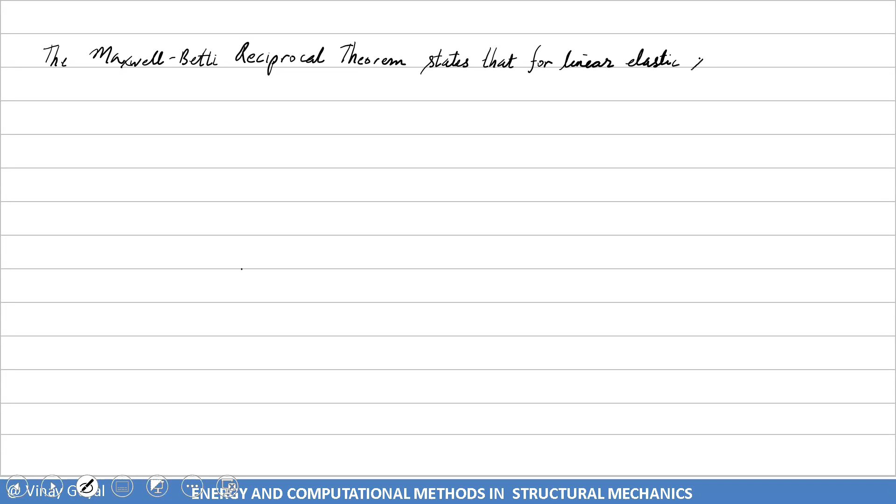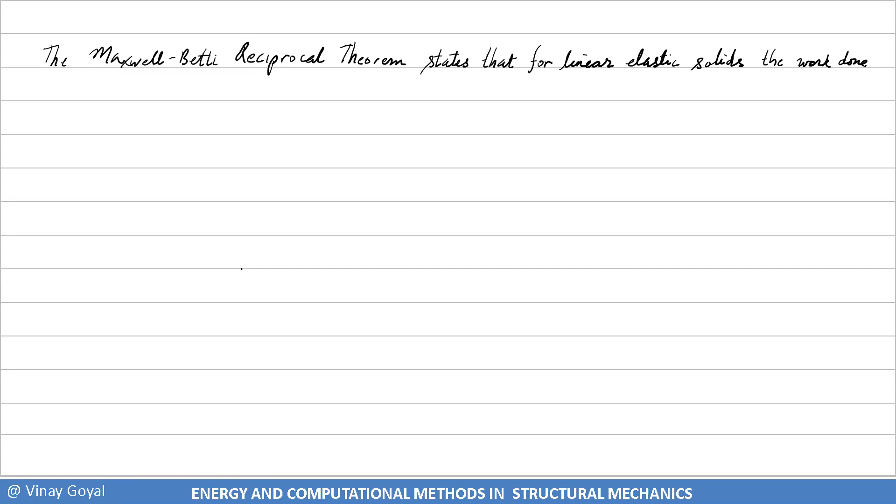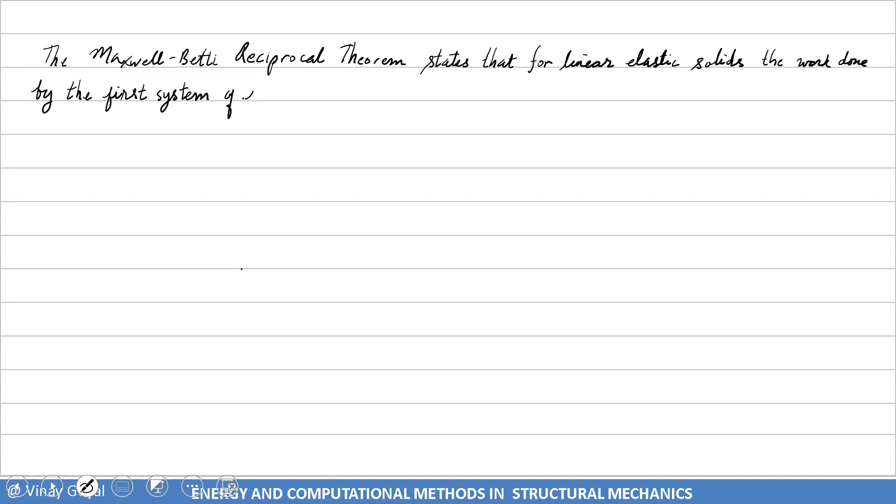The Maxwell Betti reciprocal theorem states that for linear elastic solids, the work done by the first system of forces 1 through the displacements caused by the second system of forces 2 equals the work done by the second system of forces 2 through the displacements caused by the first system of forces.

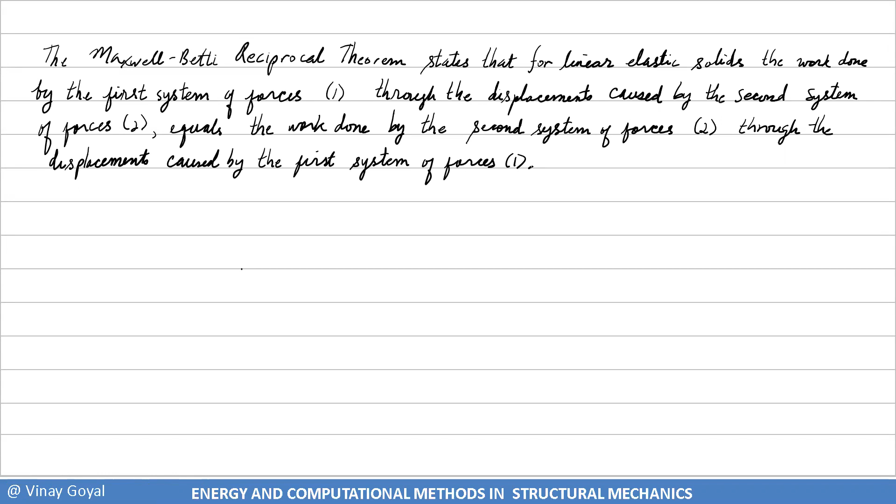And for this theorem to hold, it is necessary that we have a conservative deformation process.

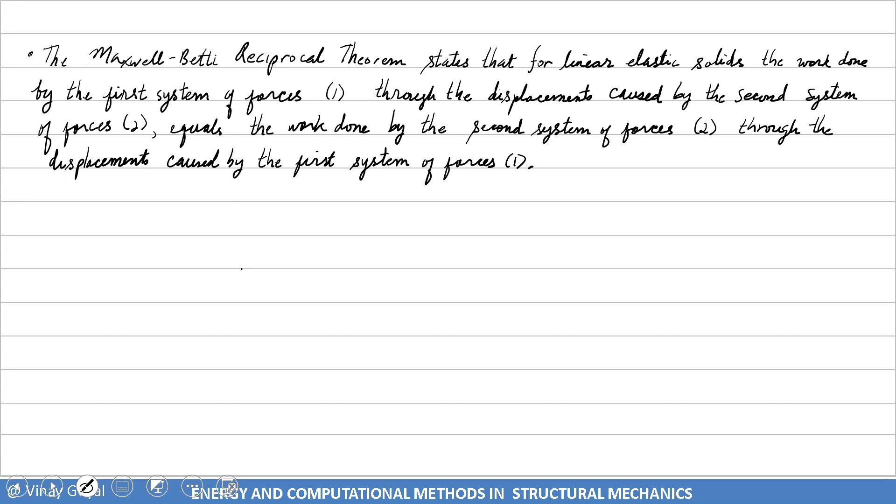This theorem is important because it explains why the stiffness matrix in 3D FEM finite elements is symmetric when we have a conservative deformation process and conservative loads. So anytime you have a conservative deformation process and conservative loads, you will expect a stiffness matrix in 3D finite elements that will be symmetric. The Maxwell Betti reciprocal theorem is basically the reasoning behind that.

So what is Maxwell Betti's reciprocal theorem? It states that for linear elastic solids, the work done by the first system of forces 1 through the displacements caused by the second system of forces 2 equals the work done by the second system of forces 2 through the displacements caused by the first system of forces 1. I want to walk you through what this is through an example.

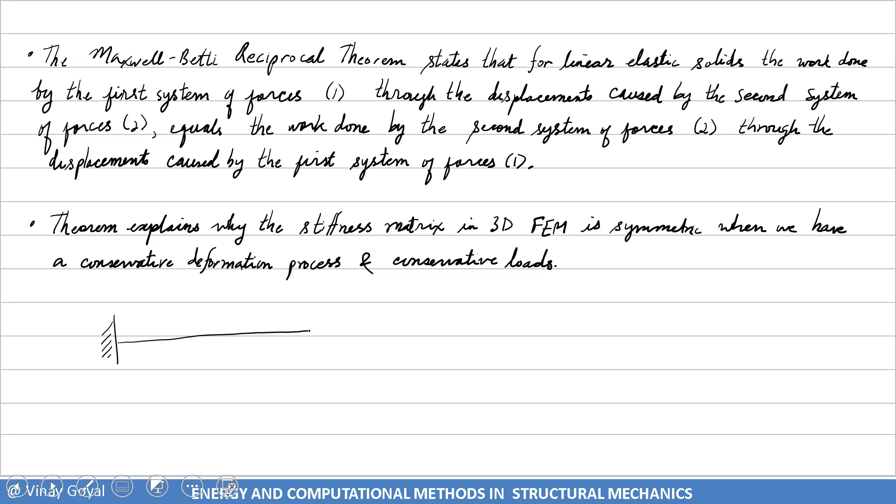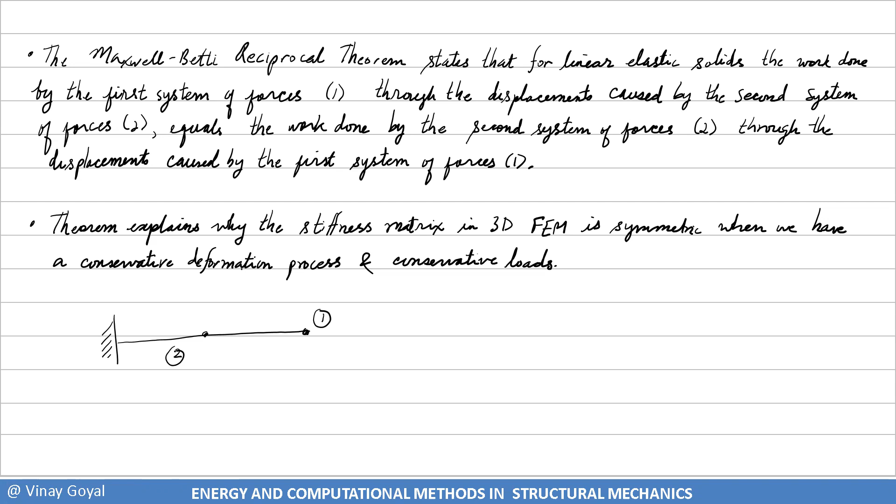Let me try to explain what this theorem is really saying. I'll consider first a clamped beam, and this is my first system. In this first system, I'll define points 1 and 2, and I'll apply a load P here. This load P is going to cause a deflection of that beam, and I'm going to call this deflection delta. That deflection was caused by load P, so I'll put delta sub P at point 2, so it's clear what's going on.

Then I'll consider another system, but this time I'm going to mark the same points, 1 and 2, and apply a load Q here at the same location where point 2 was. So these beams are the same, and now this beam is going to deflect like that. I'm going to call this deflection delta Q1. What the Maxwell Betti Reciprocal Theorem is really stating is that if this is a linear elastic solid...

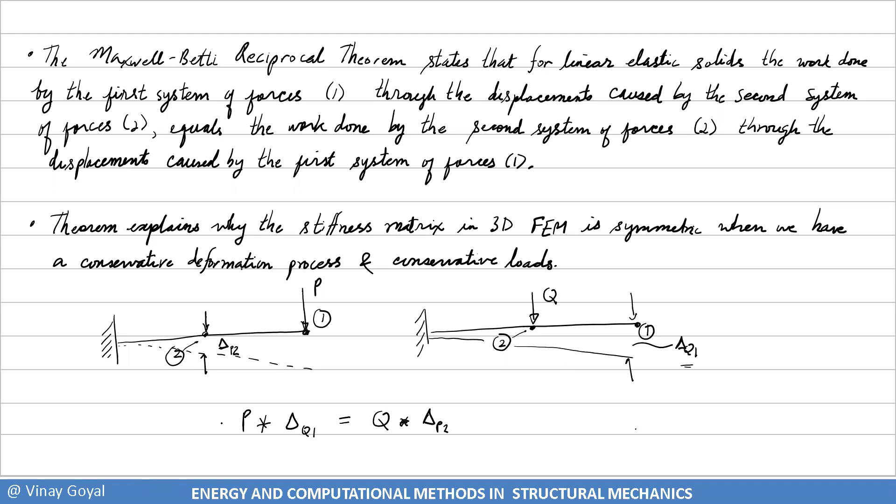...the work done by the first system of forces, 1, through the deflections caused by the second system of forces, 2, equals the work done by the second system of forces through the deflections caused by the first system of forces, 1. In other words, if I multiply P times this deflection here, that's going to be equal to the force Q times the deflection at this point 2. That's it, that's what it's saying.

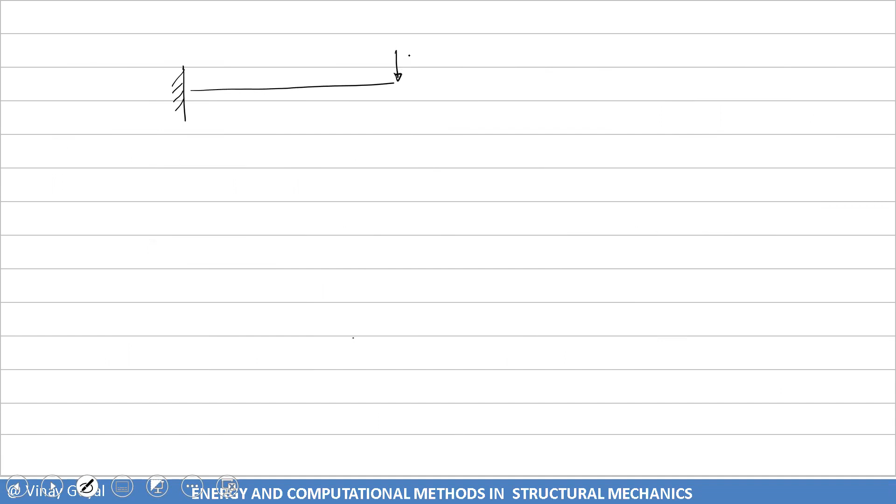So let's consider the following example. I have a load P equal 4 pounds, and the deflection at this point, at a particular point, is measured to be 0.01 inches. Then I have another system, and in this system I apply a load of 10 pounds. I want to know how much this deflects, and I'll call this X, that deflection.

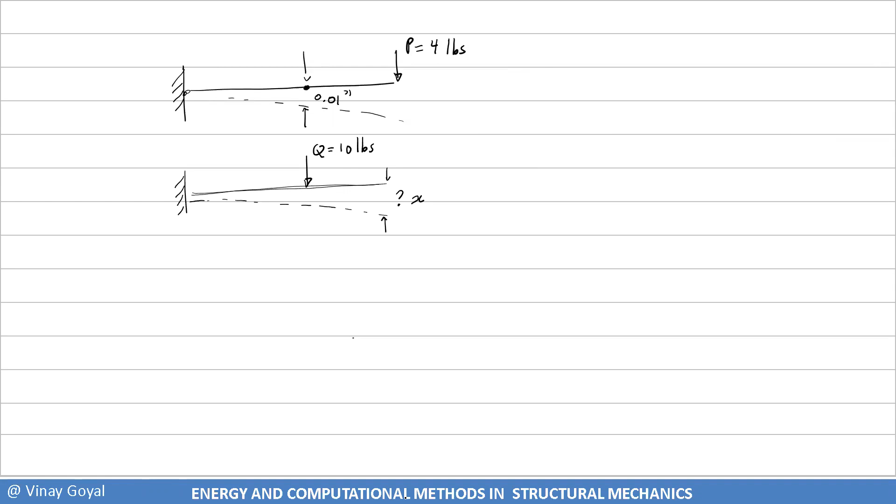So the answer is very simple. What Betti's reciprocal theorem is telling us is if the material is elastic and I have a conservative deformation process, I must have this situation: 4 times X equals 0.01 times 10. So 4X equals 0.1, and X equals 0.1 divided by 4. Very simple, and now I have found the deflection of that beam given this information. So that's what Betti's reciprocal theorem is telling us.

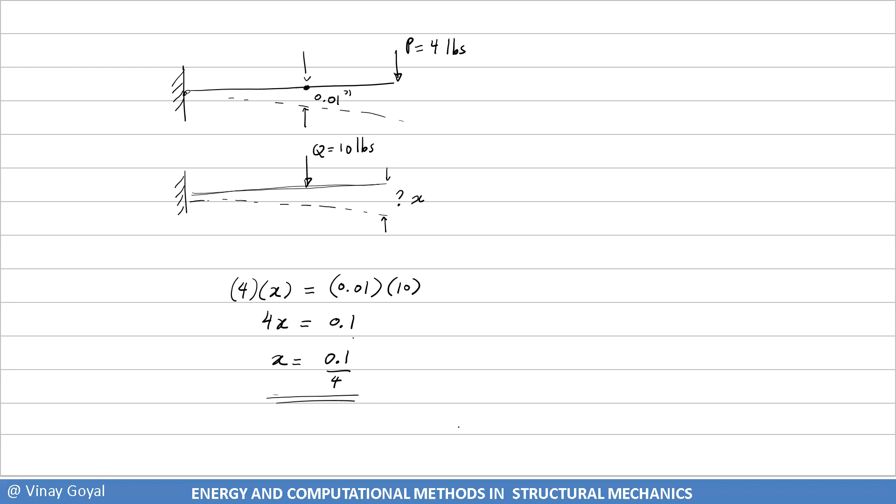So let's see how to derive this. Betti's reciprocal theorem states that one half triple integral of sigma ij for the first system of forces moving through the strains in the second system is equal to one half triple integral of sigma ij 2 epsilon ij 1 d omega. And I'll call this W, the work done. I can multiply all sides by 2 to get rid of that one half.

Now what I want to do is try to determine or demonstrate that this equation is fully correct. So the first step is to substitute the fact that sigma ij equals Cijkl epsilon kl. If I do that, I get triple integral omega Cijkl epsilon kl 1 epsilon ij 2 d omega.

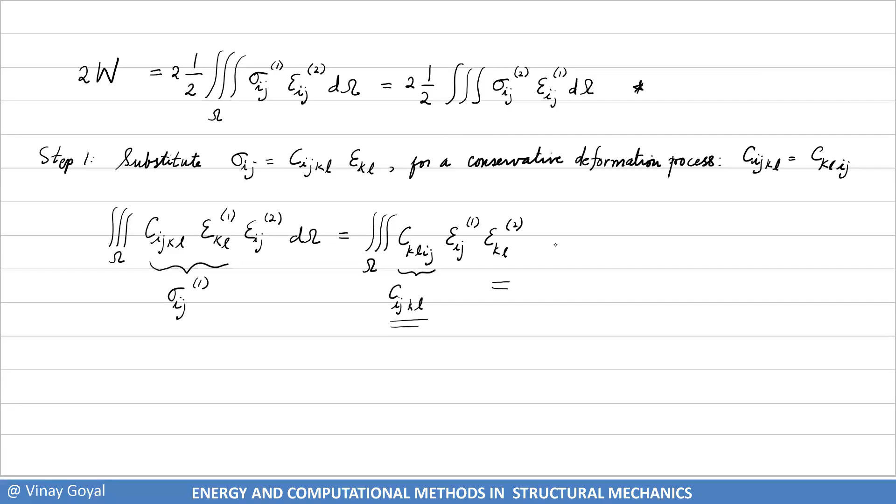But this is equal to Cijkl again, for a conservative deformation process. So therefore we were able to show that the expression I have here is correct, because this is sigma ij for one, and this times that is sigma ij of 2 times epsilon ij of 1. So I've demonstrated, I've proven this relationship right there.

So that's how we start the demonstration. Step 0, I'm starting from here, and I'm going to start from this. So I'm able to prove step 0 by going through step 1. And this played a big role - the conservative deformation process played a big role in this derivation.

We also know from the fact that we've gone through this many times that sigma ij epsilon ij is equal to sigma ij epsilon ij plus sigma ij omega ij, because this is zero. Because if I have a symmetric tensor times a skew symmetric tensor, that's equal to zero. We've demonstrated that in previous lectures.

But I also know that sigma ij times epsilon ij plus omega ij is simply equal to sigma ij ui comma j. We've demonstrated that as well. So as a consequence, we can write the following. I'm going to do a little trick right now - I'll take this information and plug it in here.

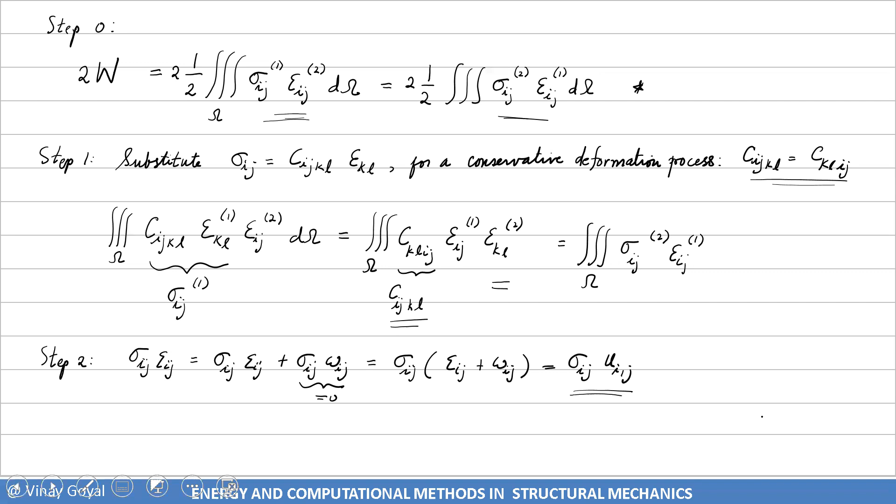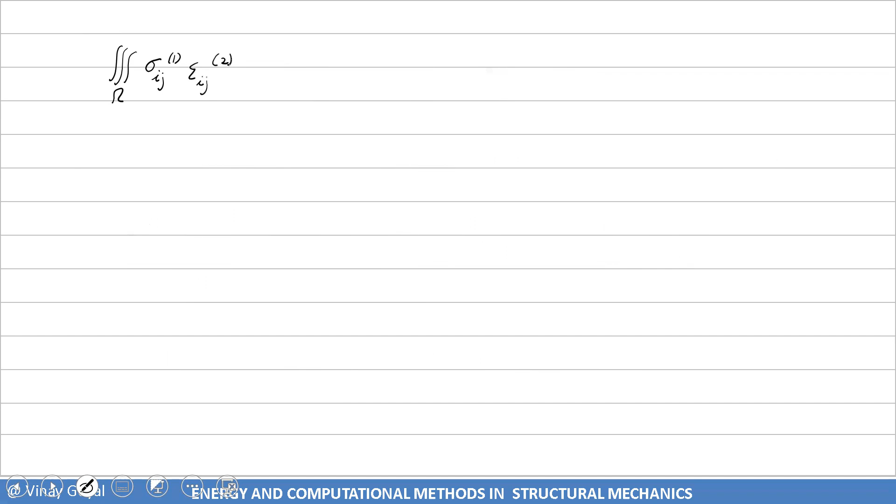Let's start with the left hand side. So I have triple integral omega sigma ij as it moves through 1, epsilon ij as it moves through. And we already said how this is equal to the triple integral omega sigma ij 1, and now I have ui comma j 2 d omega.

I'm going to turn that into - I'll do a little trick. I'm going to say this is equal to triple integral omega, and I'm going to do this derivative this way, and put that comma j outside of this. But obviously this is minus sigma ij comma j of 1, ui 2, d omega. You can see here that if I operate on this, this is equal to that.

If I operate this comma j over this product rule, minus that, I get that. So it's a little trick, but it works, as you can see. And it's correct - there's nothing wrong in what I've written. It's mathematically correct, and so we can solve for the last term. You can see clearly that this is equal to that when I transfer the comma j to each of these terms in a product rule sense.

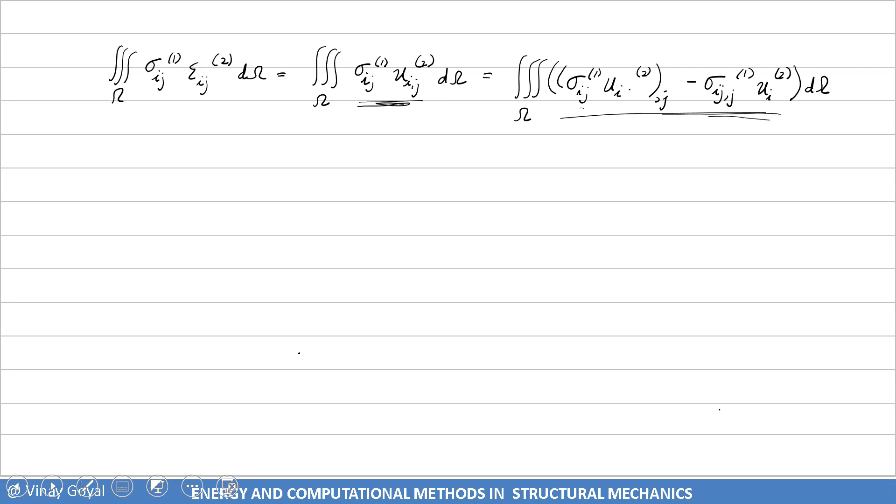Now, we all know from equilibrium - so this is step 3, step 4 - use the equilibrium equations.

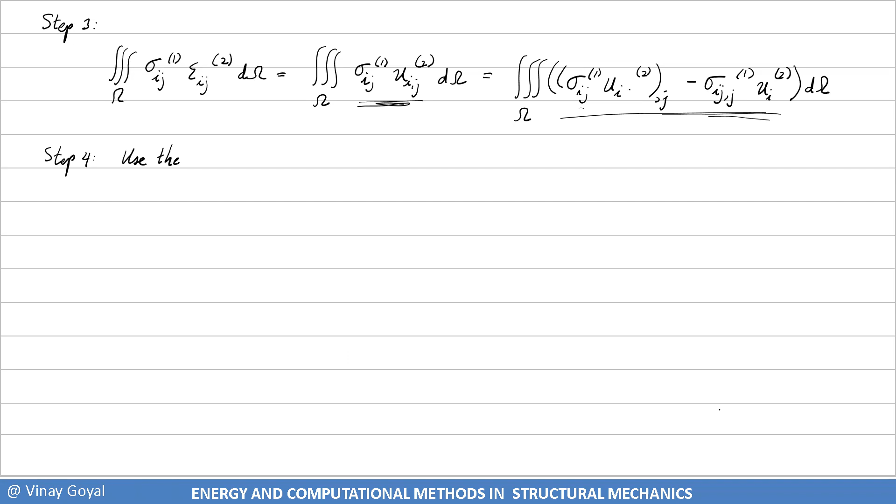If I use the equilibrium equations, we know that sigma ij, comma j, plus bi is equal to 0. And since I'm looking at system 1, I can say that sigma ij, comma j of 1 equals minus bi of 1. So I can plug that into that expression.

I'll do that now. So I get the triple integral over omega of sigma ij of 1, ui 2 comma j, plus bi of 1, ui of 2 — a little trick we're performing here — d omega. And now I'm going to use the divergence theorem on this term.

Let's use the divergence theorem on that term. That means integrate by parts, so integration by parts.

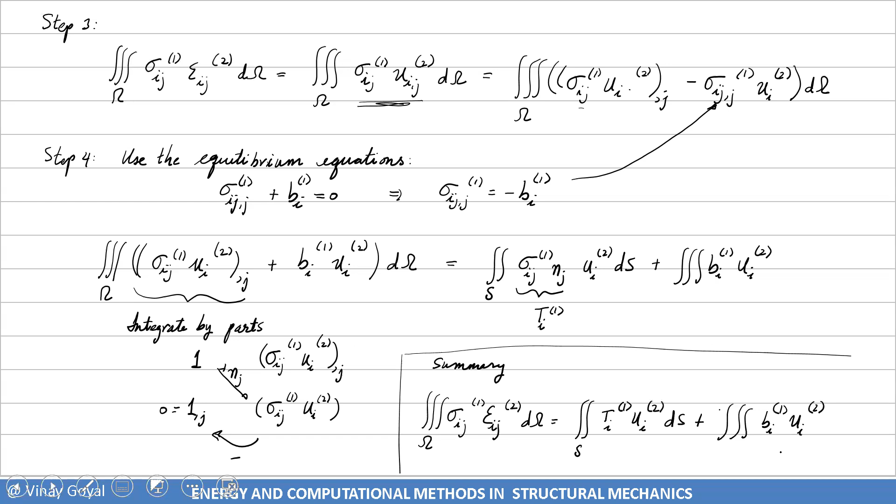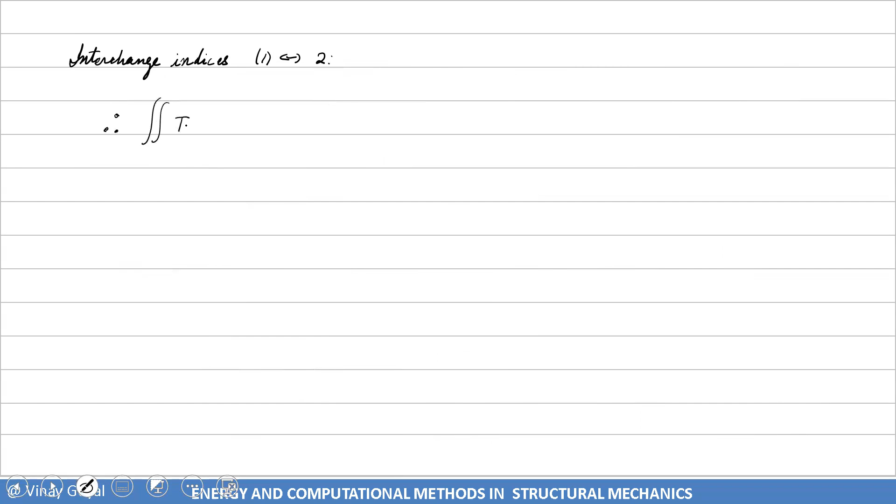But as shown before, Betti's reciprocal theorem allows me to switch indices like this, from sigma ij to epsilon ij and vice versa. So I can interchange indices 1 and 2, and as a consequence, I get that the double integral of ti of 1, ui of 2, ds, plus the triple integral over omega of bi of 1, ui of 2, d volume, equals ti of 2, ui of 1, ds, plus the triple integral over omega of bi of 2, ui of 1, d volume. So I've demonstrated Betti's reciprocal theorem, which allows us to calculate forces in a second system or deflections in a second system.

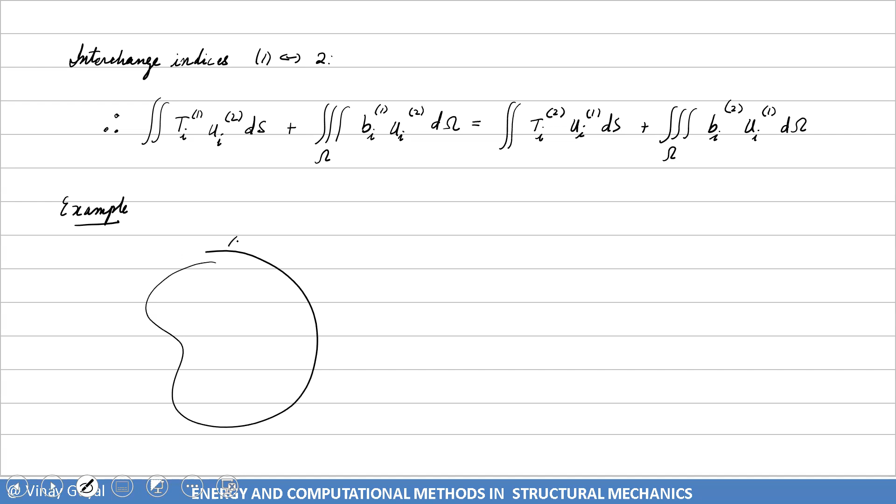Let's say I have an example. I have the system fixed here. I apply a load here, P, and I measure a deflection. Let's say this deflects an amount delta A at point A.

Now I have the same system I'm looking at, and at this point A, I apply a load Q. And it deflects here at point B an amount delta B. And this is delta A.

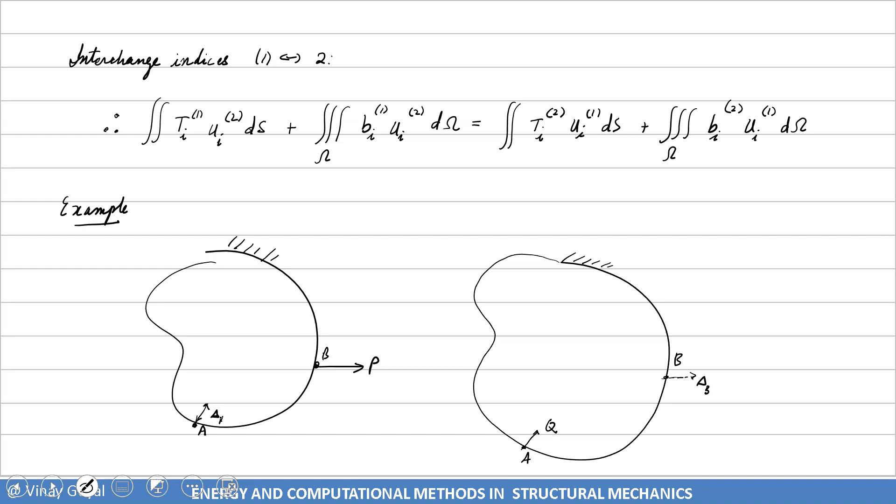What Betti's reciprocal theorem allows us to do is to take P times delta B equals Q times delta A — a very powerful idea that can be used in a lot of different situations.

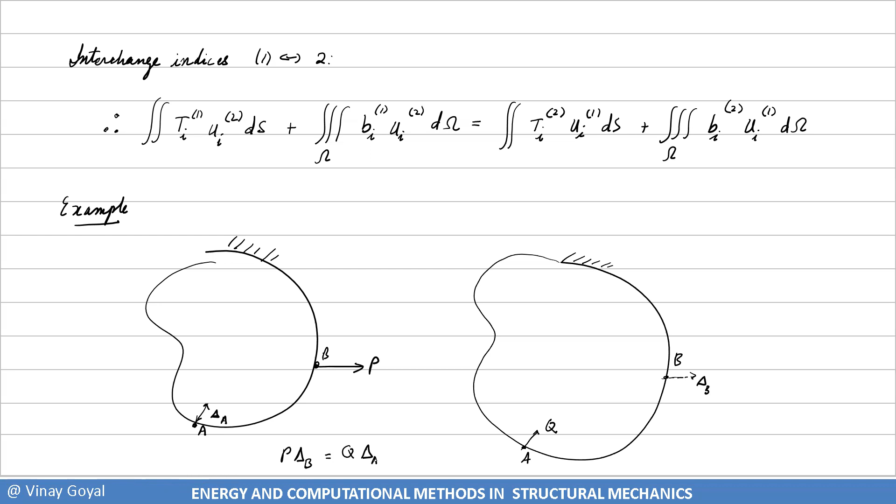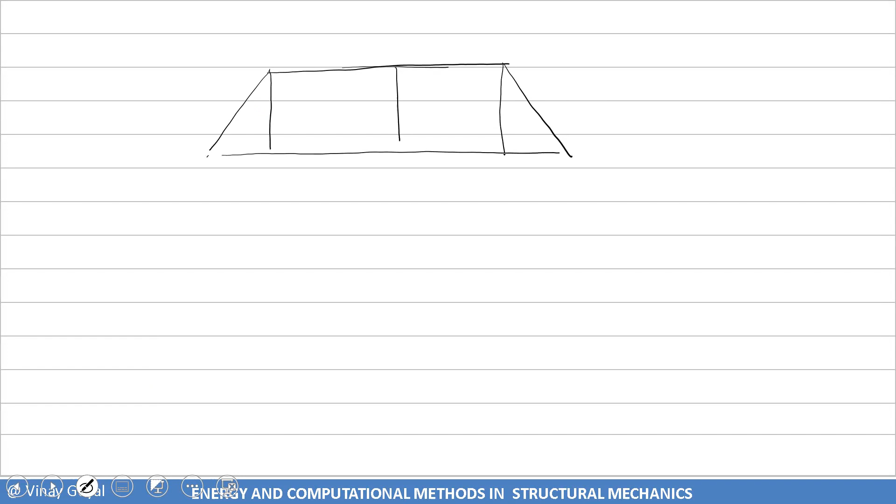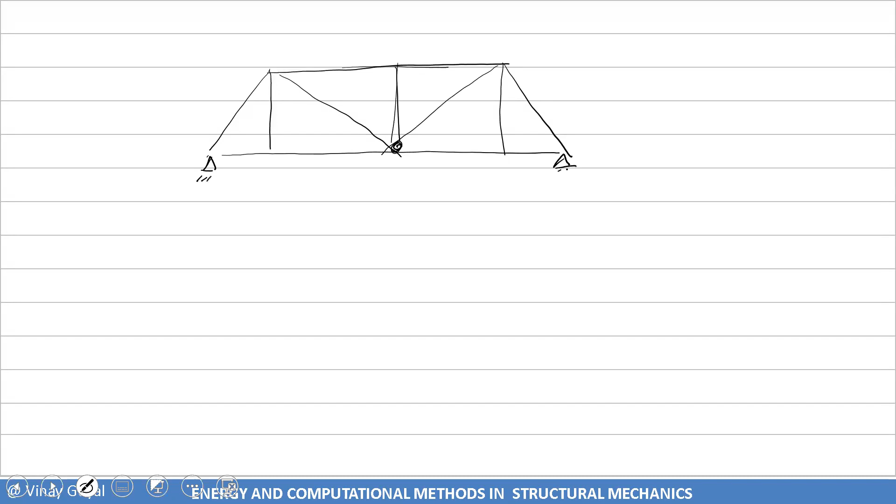Let's consider now this example. These are supposed to be squares, but I'm kind of rushing through this, so I apologize.

Let's say I want to measure the deflection of point A. So I call this point A and this point B. I apply a unit load at point B, and I measure this deflection, which is delta A due to a load applied at point B.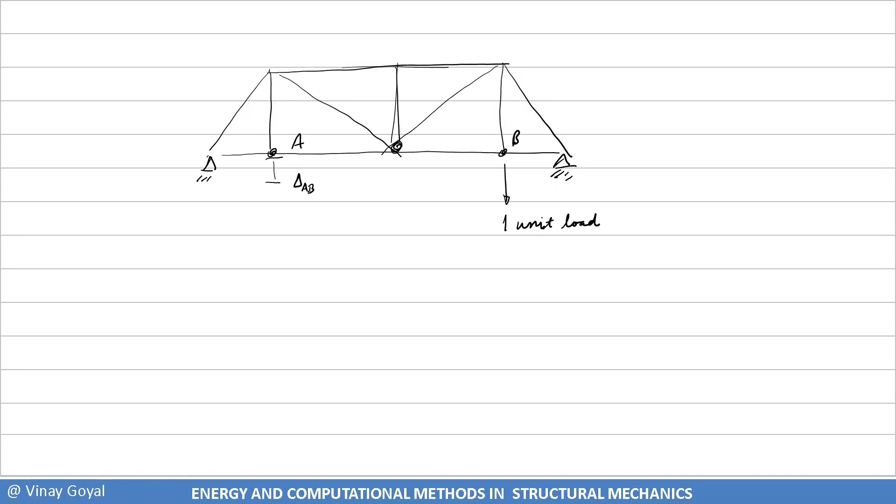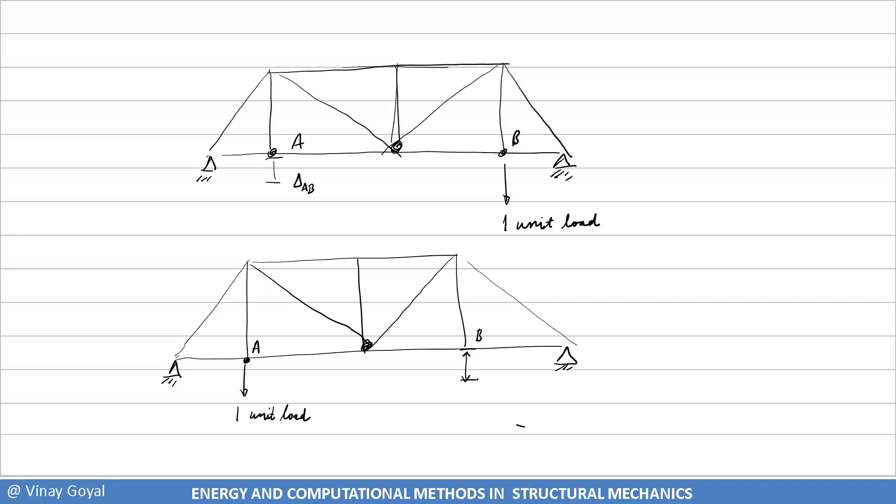In the second situation, it's the same truss system, but it's going to look different because I'm not drawing it perfectly — you get the idea. I apologize if things aren't very clear in the diagram, but it's the same truss system. Now I apply a unit load here, and here I measure the deflection, how much it moves. That's the deflection at point B due to a load applied at point A.

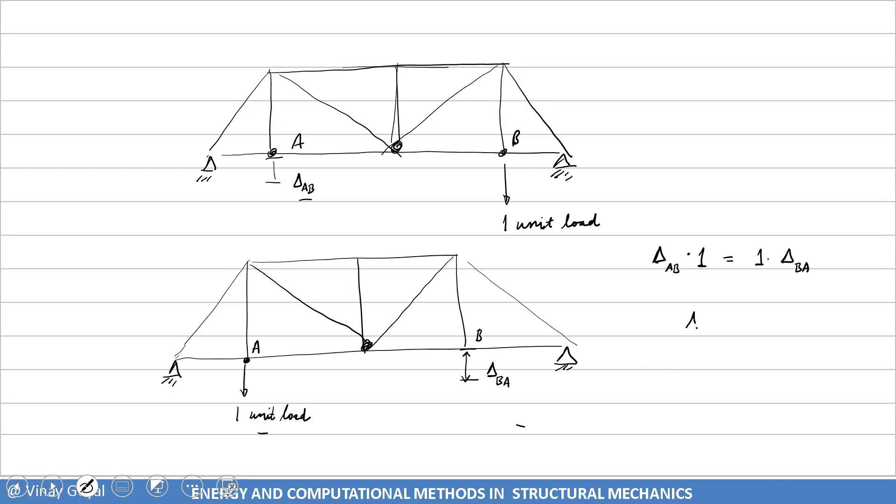If I use Betti's reciprocal theorem, this tells me that delta AB times 1 is equal to 1 times delta BA. In other words, the deflections are equal, which is quite amazing to see happening here. That concludes example 2. I think we could do a lot more examples, and all of them would keep showing that this works.

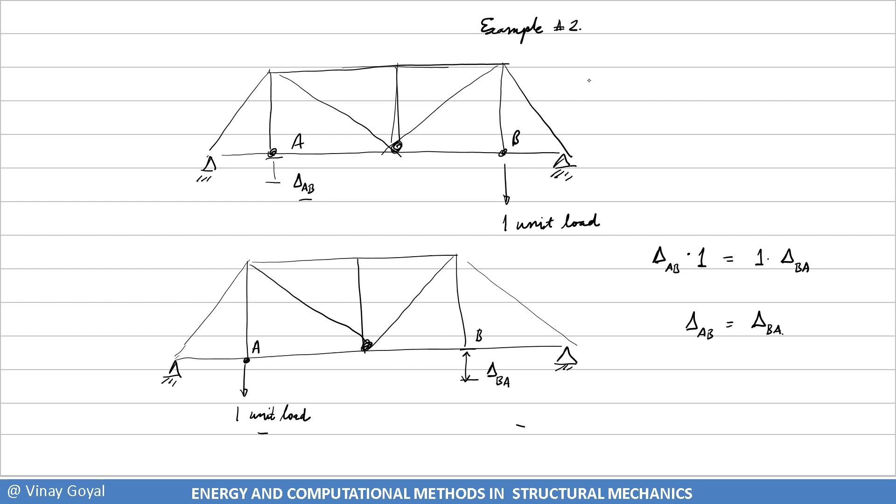So we'll stop at this point, and we'll continue the coverage of energy theory.